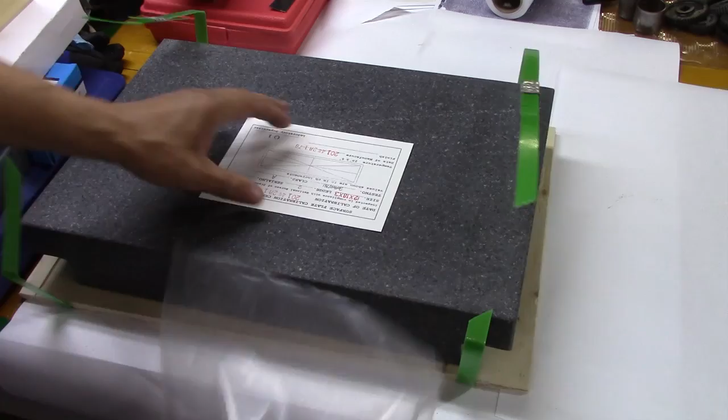Ta-da! No, actually it is a granite surface plate. Check that out, boys and girls. I got a 12 by 18 granite surface plate. So that's the first thing. I'm going to set that aside and we're going to continue to unbox.

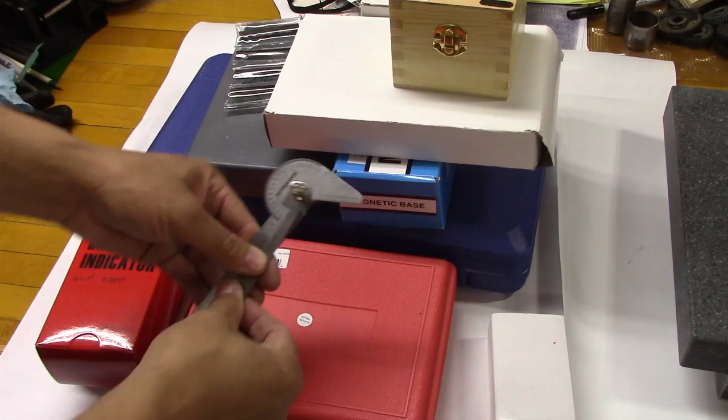Let's just start off real quick. I got this angle gauge from Harbor Freight, can't remember how much, but it was cheap. So I'll get the Harbor Freight stuff first up, it's this thing right here. And also they had some parallels, I believe this was 20 something bucks, and they're parallels. I knew I was going to need some parallels for doing this journey.

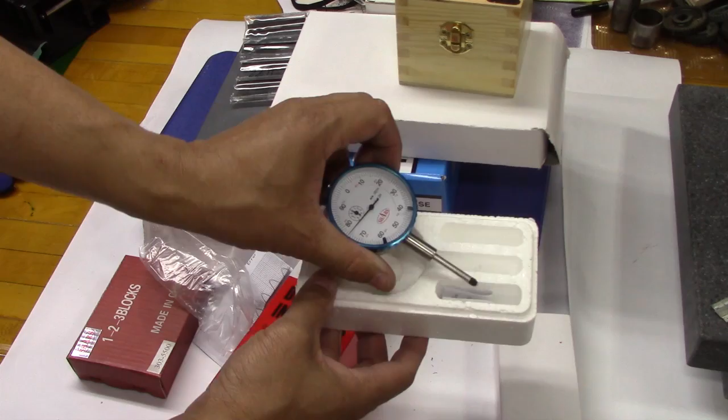Alright, next on the agenda, it's a 0 to 1 inch dial indicator. Take a look, see here. And here she is. I'll show you where I got this online, but it's a 0 to 1 dial indicator.

Next up, let's take a look here. What on earth could this be? Let's see here. Oh, dial test indicator. So we got the dial test indicator. Put that over there.

And here we have, oh, got some V-blocks with clamps. So here's the V-blocks. Let's see how that looks here. Sweet, wow, that looks cool, guys. Alright, got a set of V-blocks with the clamps for them.

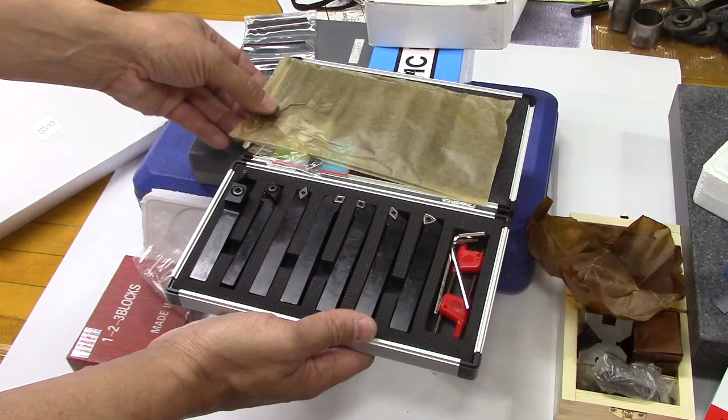Next up, let's take a look, see what this is. This is a 7-piece indexable carbide turning tool set, it's a 1/2 inch. The reason I got this, guys, is I want to see if I can figure out how to turn and cut, and take something out of the equation, which is me grinding the tools. These should be perfectly ground, so I can at least do some cutting while turning. That's kind of why I bought this set.

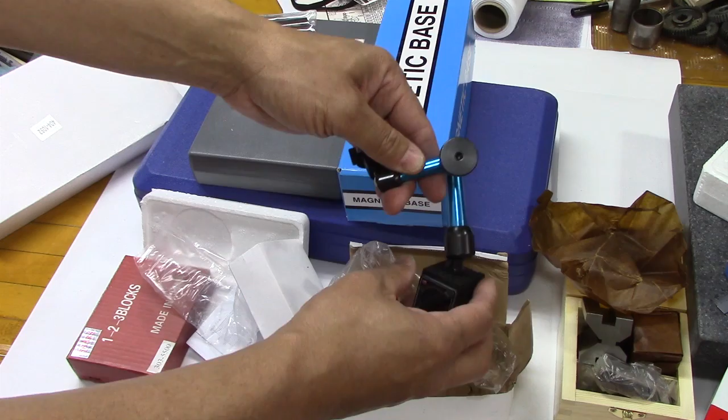Right, next up is, let's take a look, see. Oh yeah, this goes along with the dial test indicator. So we'll get all this stuff set up. This is the mag base for the dial test indicator. And now I also bought these 1/4 inch cutting tools, I'll show you why in a second. So I got some cutting tools.

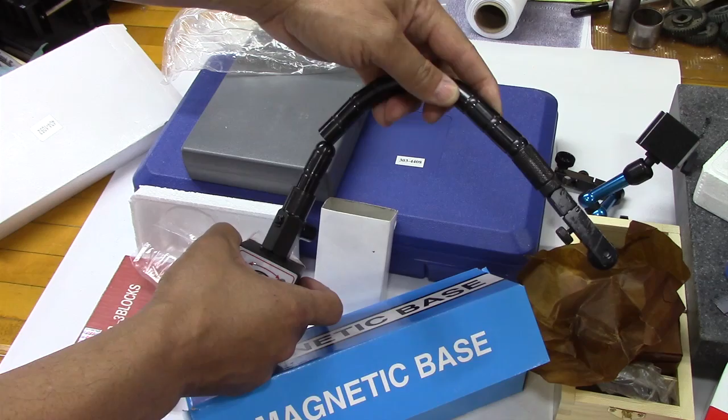And here's the mag base for that first 1 inch dial indicator. And it's one of those ones that can lock into place at any type of setting here. You can lock it.

Alright, we'll continue on with, let's see. Oh yeah, some squares. I needed some machinist squares, so I got, I think it's 2, 3, 4, and 6-inch squares.

And we also have some 1-2-3 blocks. So pull those out of there.

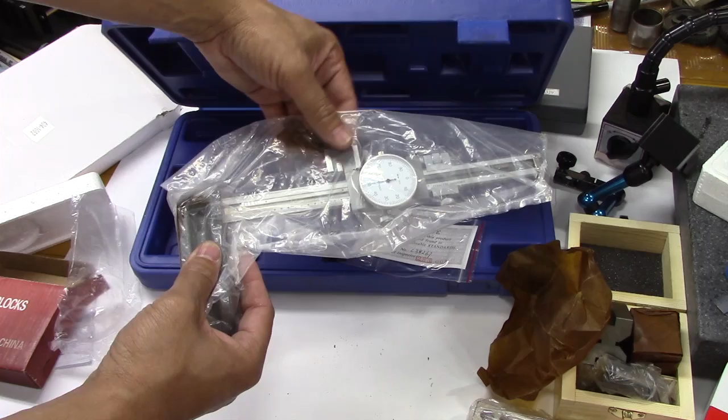And last but not least is, ta-da, a 6-inch height gauge. That goes with the granite block. So I'm going to see how all of this stuff works.

One other quick thing I'm going to show is this. Now I got this, and it turns out this is the 1/4-inch fly cutting tool, but I got this from Little Machine Shop online, and that's why I got these cutting bits from Shars to go in there and see if I can learn how to fly cut.

So I'm so excited I got all of these tools now. Now, you know, some people have more money than brains, and that's me. And I'm broke, so you do the math. Anyway, I'll show you how all of this stuff looks. So look at all of this cool stuff.

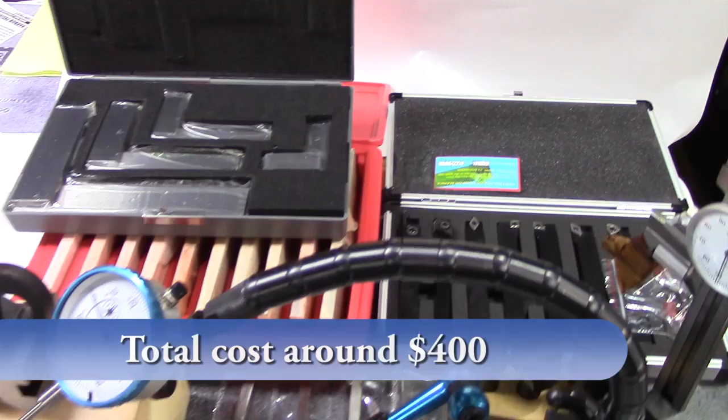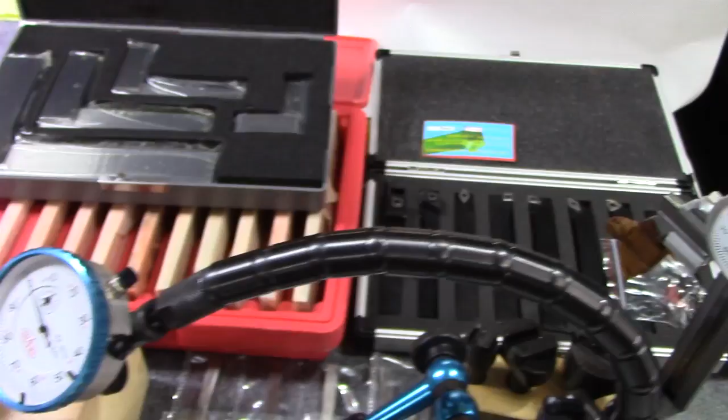Now the hard part, I've got to learn how to use it. But I love this. I mean, this little granite surface plate and all of this stuff is so doggone cool. Honestly, now I really do have to learn how to use this stuff. It's going to be fun.

In order to use this collet holder in the chuck, it needs to have this drawbar. It goes through here and it tightens it up. With all this slack in here, it can't tighten up, so there's spacers, and this drawbar didn't come with it, so I made one.

Now this was back when I was just getting the lathe fixed, and if you look real close, it's pretty much a hack job, but it works. It slides through, and now it allows you to take up the space in here and draw the collet bar.

The problem is it doesn't have a little recess in here, and it wobbles around. So I'm going to make... oh, by the way, this is the thread protector that goes on here.

Just some 1/2-inch stock, so I got a 1/2-inch collet in there. There's the protector, there's the 1/2-inch stock. Of course, I wouldn't have it hanging out that far, but anyway, just to show you what I'm doing, here's the protector, the collet holder in position.

Now, when we turn this baby on, see there's a big old wobble right there. Now this wobble I'll explain later, but this wobble can be fixed. It just needs to have a recess cut on here so it slides a little bit down in the spindle, and so it doesn't move back and forth. Just a little bit of ridge put on the spindle, and I'll show in a drawing how I'm going to do that.

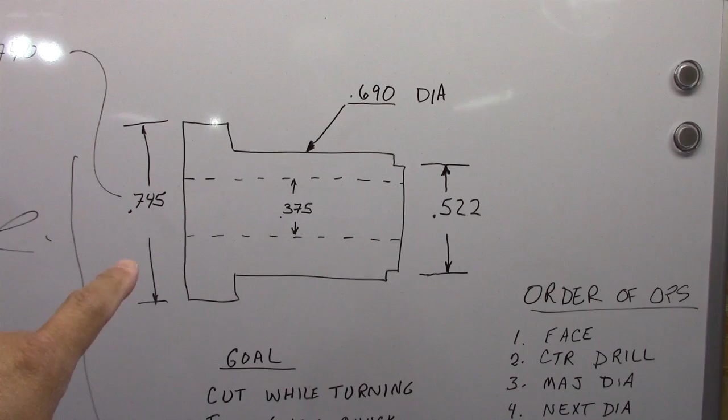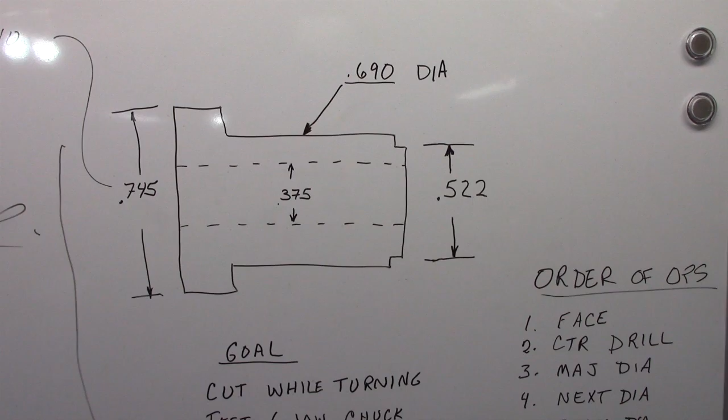Now, okay, this is what I'm going to try to make today. It's the spacer for the collet closer, and those are the dimensions. Really the only critical dimensions are the 522 thousandths and 375, the bore through it. They're not really super duper critical, but they should be fairly close just to fit.

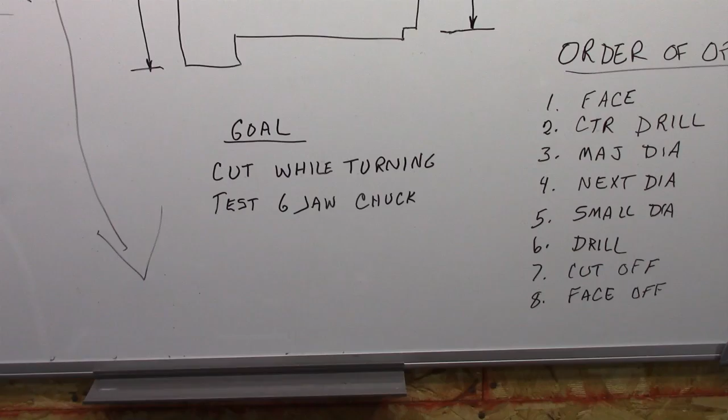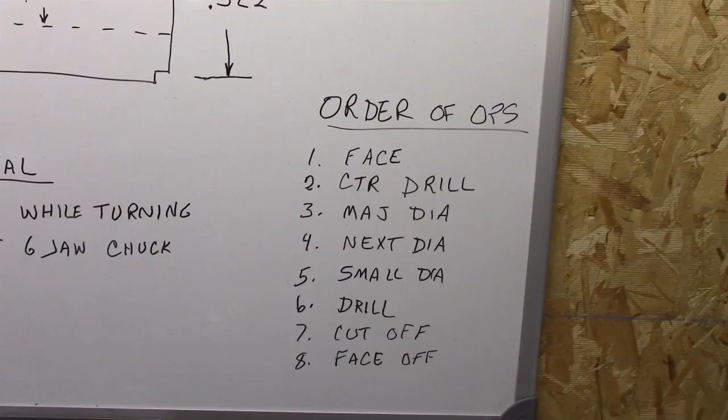Now my goal on this little project is to start cutting while turning instead of just rubbing metal off, and test out that 6-jaw chuck. I came up with an order of operations: first face off the end, then center drill it, then get the major diameter, then the next smaller diameter, then the smallest diameter. Then drill it out, cut it off, and face it off.

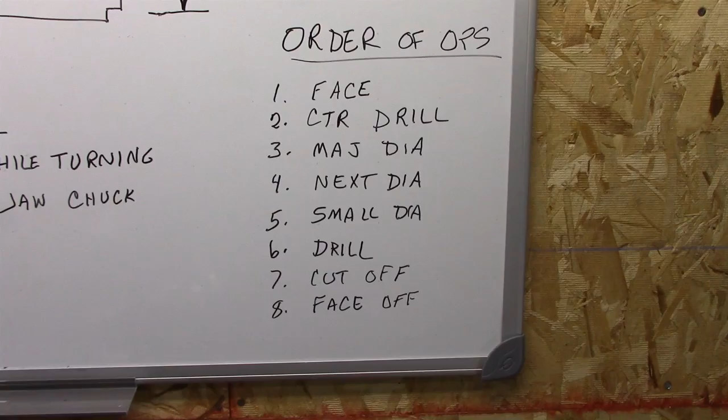So let's get started. Okay, here's the stock we're going to start off with. It's a little bigger than 3/4. I do believe that's hot rolled, and we're going to try to make this. So here we go.

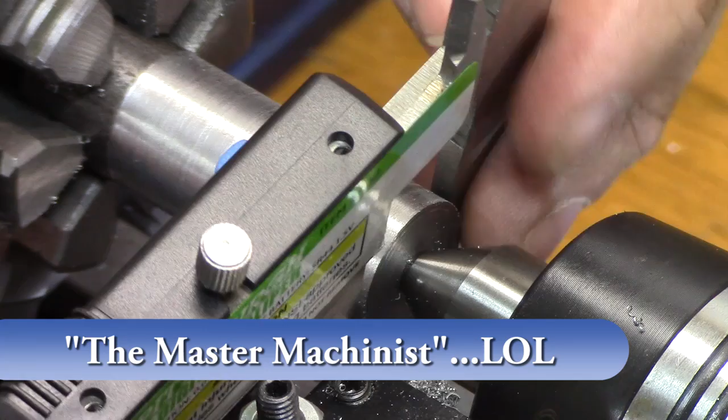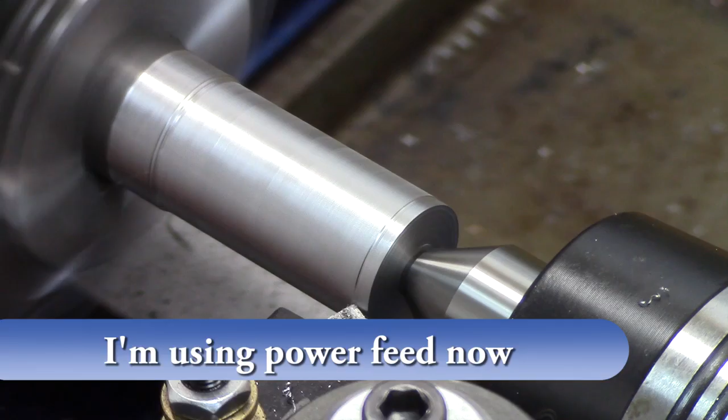Okay, so something's causing chatter. That was pretty nice. So out there's no chatter. Speed's going the wrong way, so I'm going to tune it down a little bit.

I see, you can still feel that there's a... yeah, it's not, just got to figure out how to do it. So, let's see.

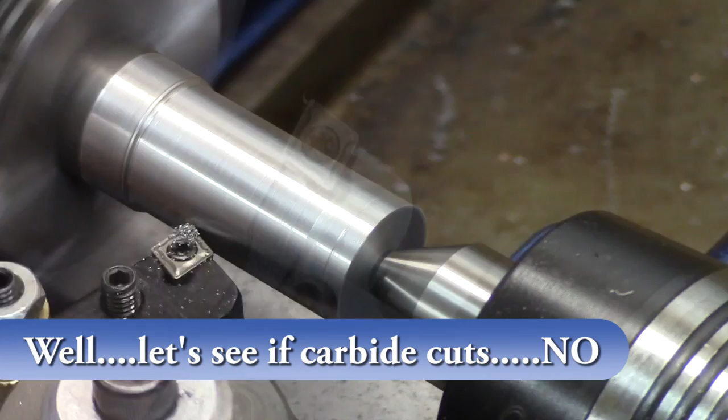This is the tool I just tried, and maybe I'll try this one. But this seems like it's just rubbing metal, it's not really cutting. So we'll see what happens.

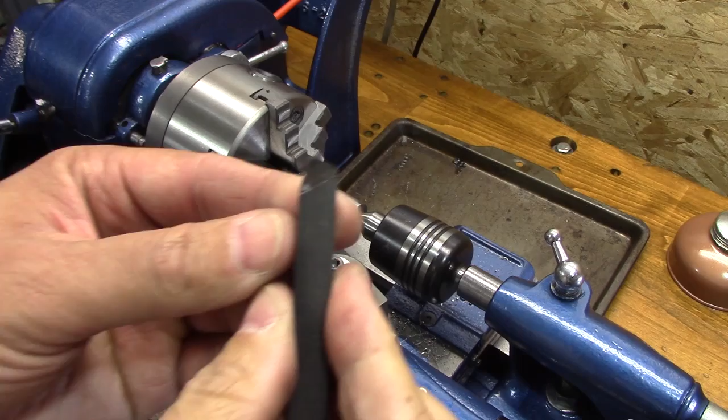Well, no luck with the carbide. So we'll try this high-speed steel. Continue on trying to get it to cut on the turning. We'll see what happens.

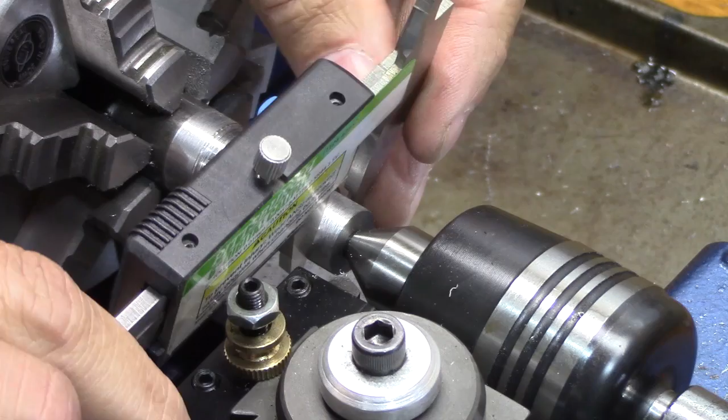Well, it looks like my order of operations may have been out of order. It's going to be very difficult to run a drill down through there with it only biting on so much. So I got to figure out if I want to try it, see how true that's turning. I may try it, I may try that. I might have to pull that out and turn it around to drill.

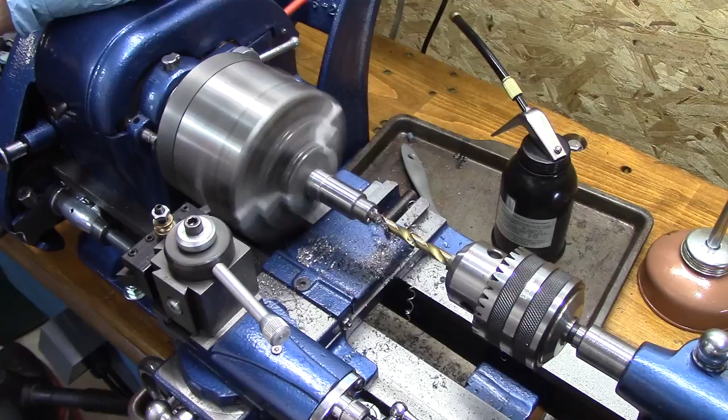It may be a little bit loose in there.

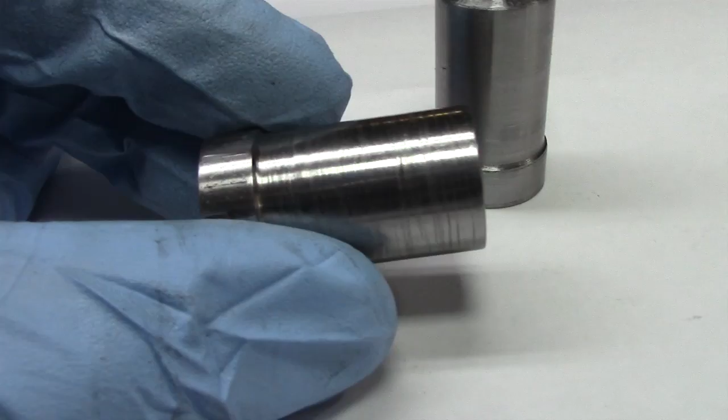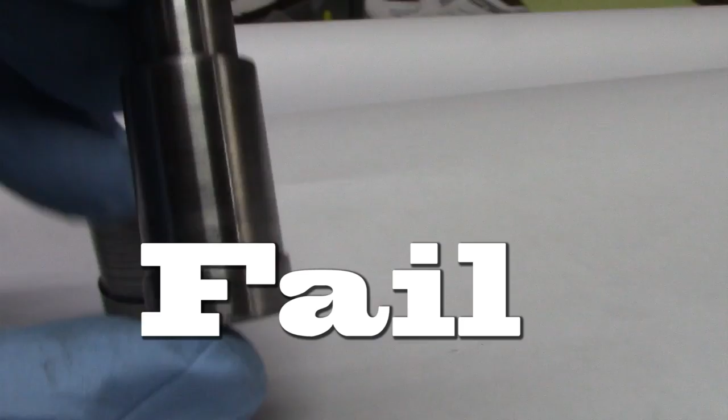Well, this is the first piece I made, and you can see that there's that record player finish on there. And here is my attempt at making the second one, and it's a fail because now that I got it like this, I can't hold it to cut this down to the right size to fit into the spindle anymore. So I can't really clamp it. So this will be classified as a fail.

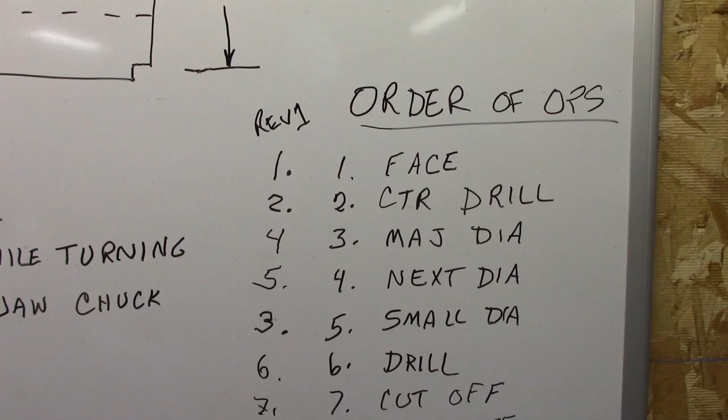So I'm going to go back and change the order of operations and see if I can make this thing right. So after the first fail, I had to really take a good look at the order of operations.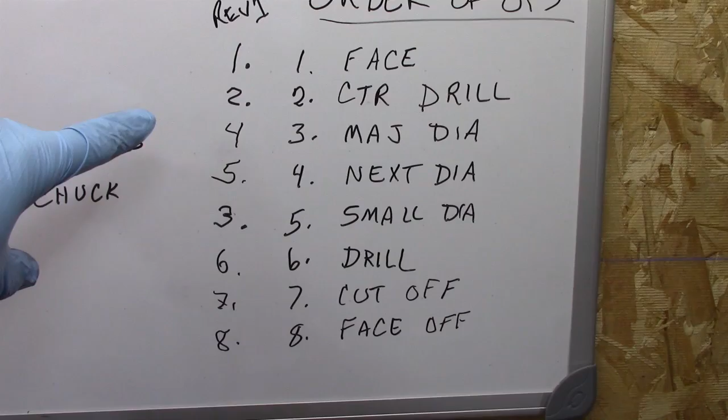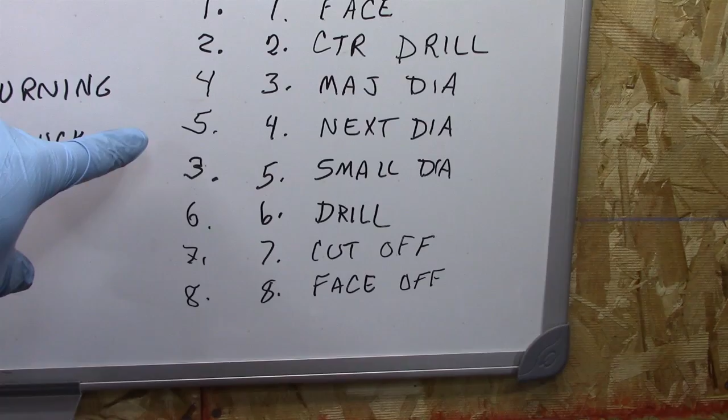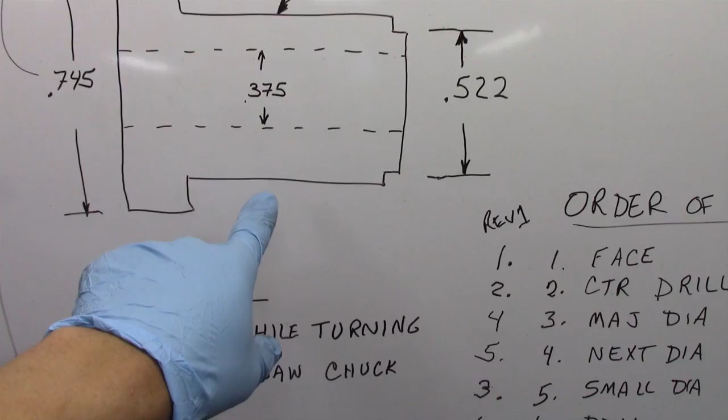Revision number 1: still going to face it. Number 2, center drill it. Number 3, do the small diameter. Number 4, do the major diameter. Number 5, do that step diameter. Number 6, drill it. Number 7, cut it off. And number 8, face it. Now those diameters we're talking about: there's a small diameter, a large diameter, and the intermediate diameter. So that's the order of operations on revision number 1.

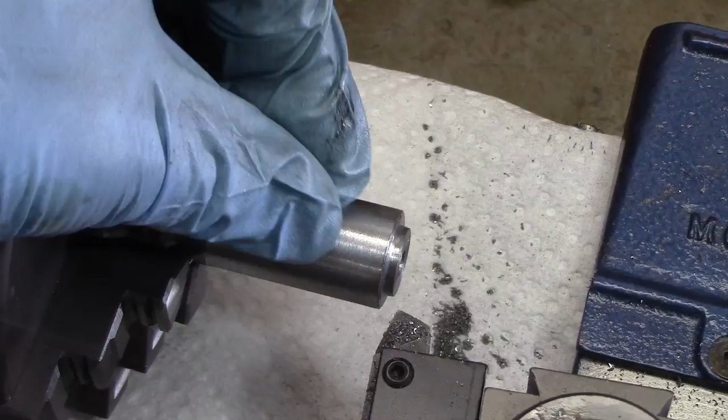Well, I went out and tried to cut a high-speed tool, a right-hand turning tool, and I just went online to watch some guys. I tried to put the radius on there correctly, it's a 1/4 inch. I know it's not perfect like those guys grind it, but I ground that relief here, the relief here, and the relief here. This is how it looks straight on. But I'm going to give that a try, see if I can get this thing to cut. I'm going to try to cut it this way, right-hand turning tool.

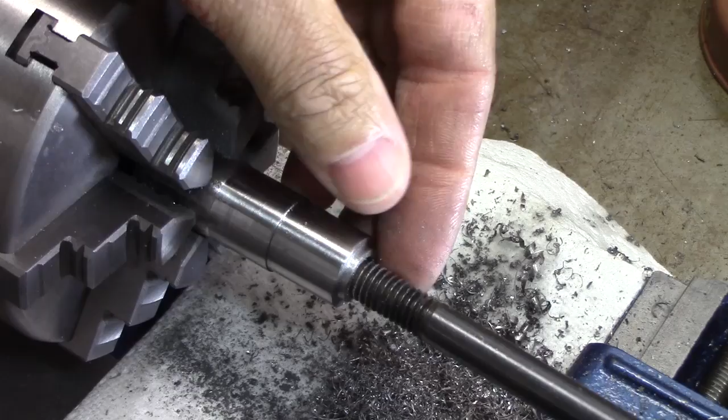Guys, that looks amazing. I have to admit, it looks amazing.

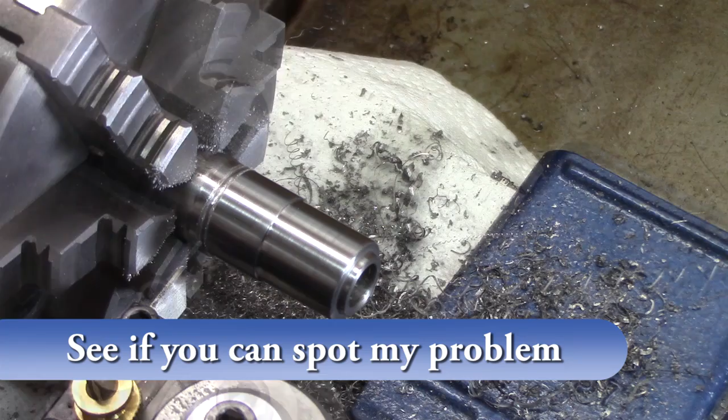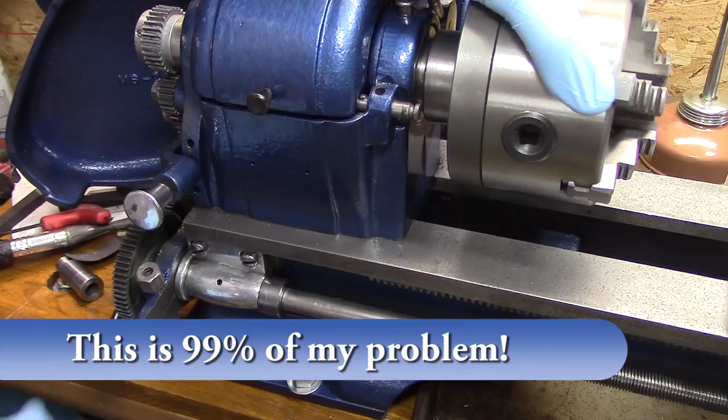Well, I found some of the problem, guys. When I was doing that cutoff, I kind of saw some movement. The entire headstock's loose. It probably happened when I was doing that first project and tore up my teeth. So anyway, I'm going to have to take this thing off and get the headstock tightened back up.

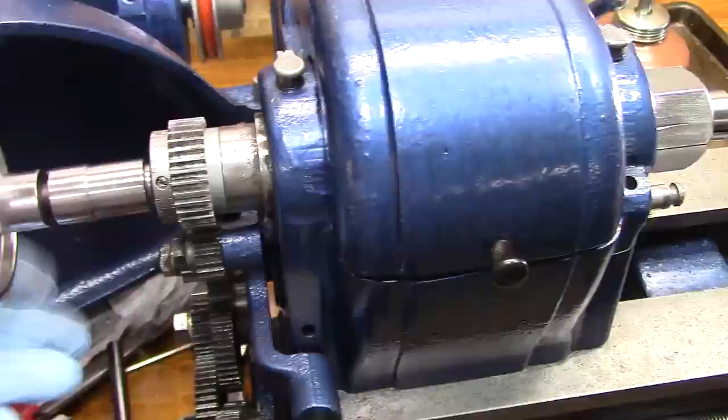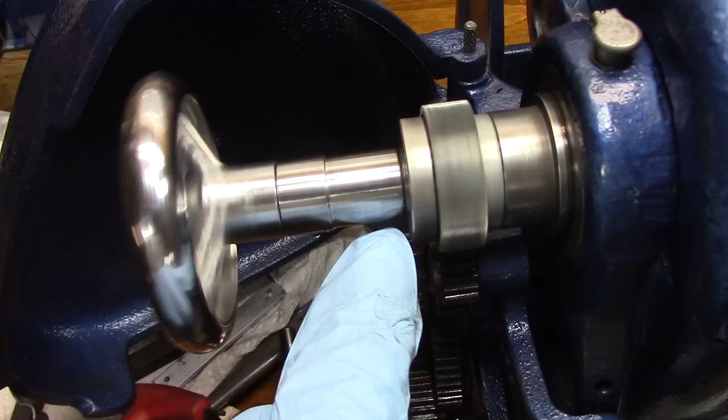Alright, here's a little thing. It snaps right into that little hole there. Got a collet in there. There's the collet spinning. Nice and true right there. Now, that wobble has nothing to do with this. This is dead on true.

But what happened is, well, hammer and chisel mechanic that I am, trying to get this out of there, I hit this with a rubber mallet. I didn't realize I had bent it up, so that's off. So I'm either going to try to bend that back or get a new wheel. But anyway, project number 1's right here.

Project number 2 is right here, and I'm so happy at how that turned out. That turned out beautifully, but it was mainly from polishing, not from machining.

Okay guys, this is still a journey, and here's the deal with being on a journey. I'm not a journeyman by any stretch. I'm an apprentice on my best day, but a lot of lessons learned on this one. Number one, if you've had something break on your lathe, inspect everything else.

Because it turns out no matter what I did to try to get the chatter out and get a good cut, it wasn't working because the bolts for the headstock kept loosening, and I didn't realize that until I got to almost the last step. I saw the piece move, and I couldn't figure out what that was, so I checked it, and sure enough, the headstock had loosened up.

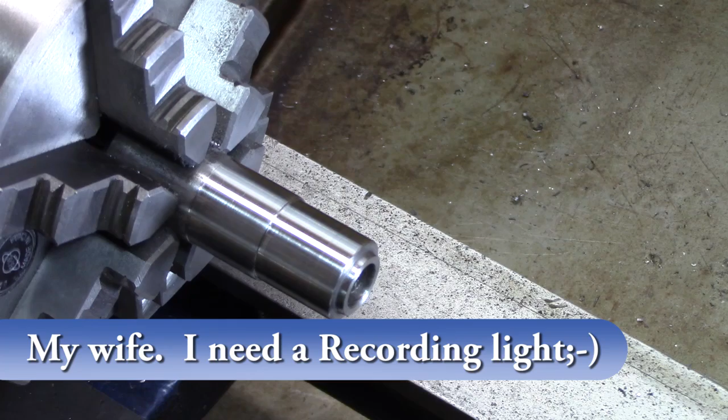You made that? Yeah, yep. What is it? It's...